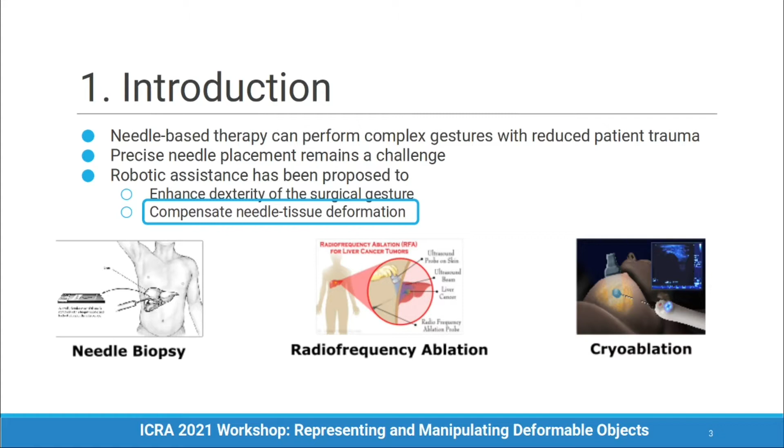In this work, we addressed needle-based therapies, in which precise needle placement remains a challenge. Robotic assistance has been proposed to both enhance the surgical gesture and to compensate the complex coupling between needle and tissue during the needle insertion. In this work, we'll target specifically how the robot can account for the motion of these deformable bodies.

The use of naive, rigid strategies for needle steering can lead to huge positioning errors. In green, we can see where the rigid strategies assume the needle tip to be and the result of a finite element simulation of the insertion.

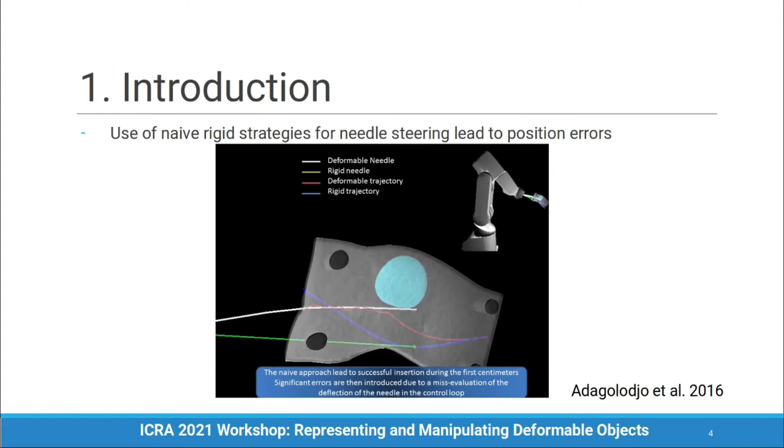The state-of-the-art discusses many approaches on how to model the needle steering and integrate it into robotic control. Both the kinematic models and mechanical energy models assume the needle insertion to happen into stationary tissues and only account for the needle deformation inside them. Finite element models, however, are able to simulate both of the deformable bodies and their interactions.

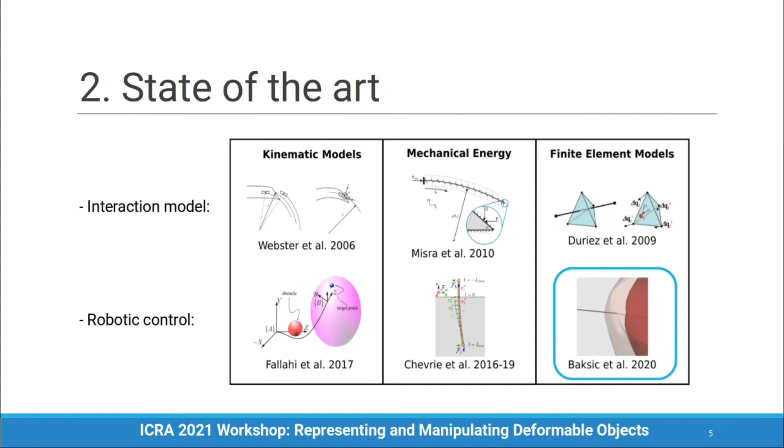We'll be taking a closer look at the Baksic et al. approach. The so-called inverse finite element simulations, or IFEM, are a promising solution. As you can see in the video, it is able to perform the needle steering in a complex trajectory while accounting for the soft tissue's deformations.

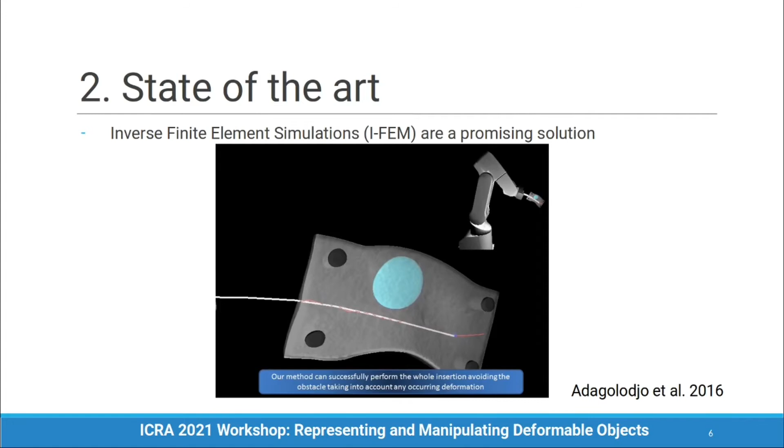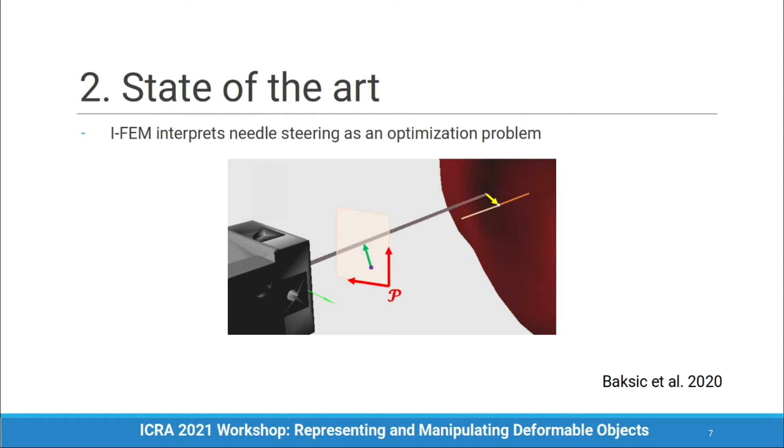IFEM interprets the needle steering as an optimization problem. It computes an end effector position which minimizes three objectives in the simulation: the tip-to-target error along the trajectory, the entry point motion, and the tangential efforts felt at the entry point. This solution is currently limited by the simulation complexity and can run at 20 Hz to perform robotic control.

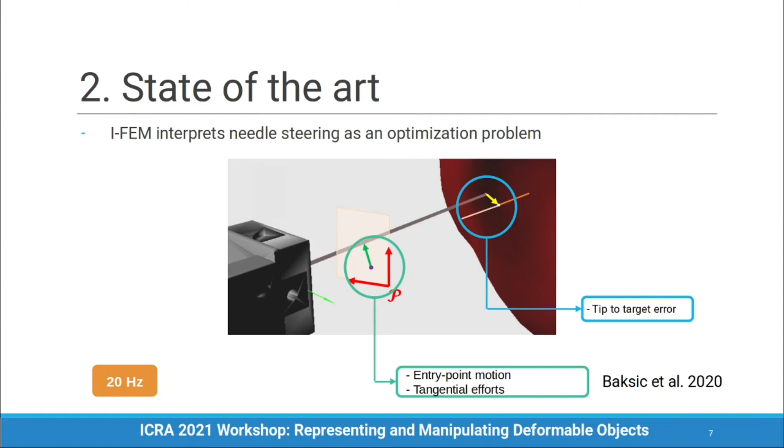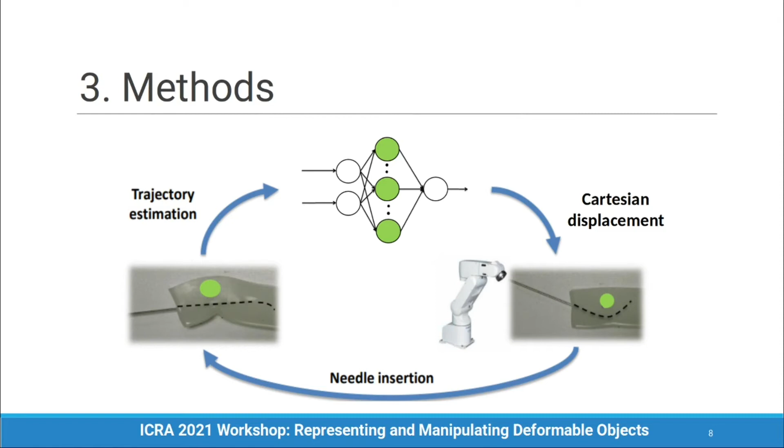In this work, we propose to use a machine learning model to solve the inverse problem and command the robotic end effector at a higher rate. The method will learn from IFEM demonstrations along 105 straight trajectories. Here are the main variables involved in the training process. We also chose to add uniform noise to the needle target position so it can better generalize to non-straight trajectories. We also compute the tip-to-target error for each time step and the displacement command produced by IFEM.

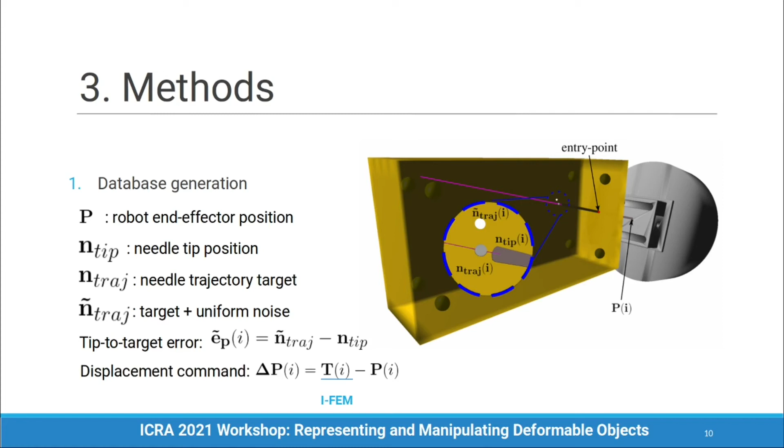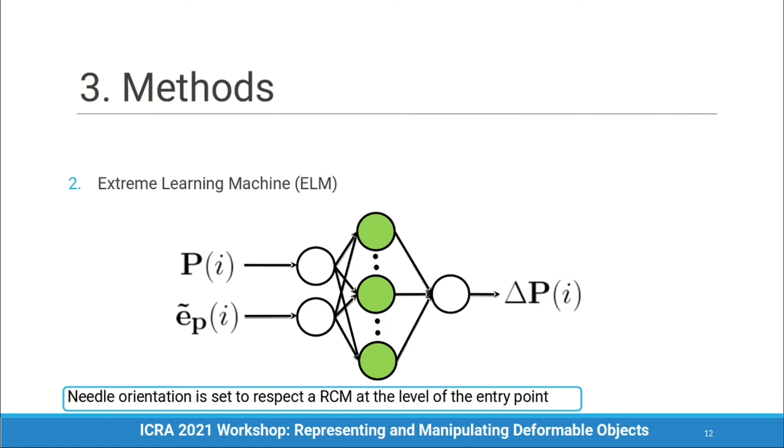The chosen neural network is called an extreme learning machine, or ELM, with a single hidden layer which presents fast learning speed and low inference time. As inputs, it takes the robotic position and the tip-to-target error and outputs a displacement for the robot to steer the needle along the trajectory. The needle orientation is set to respect a remote center of motion at the level of the entry point.

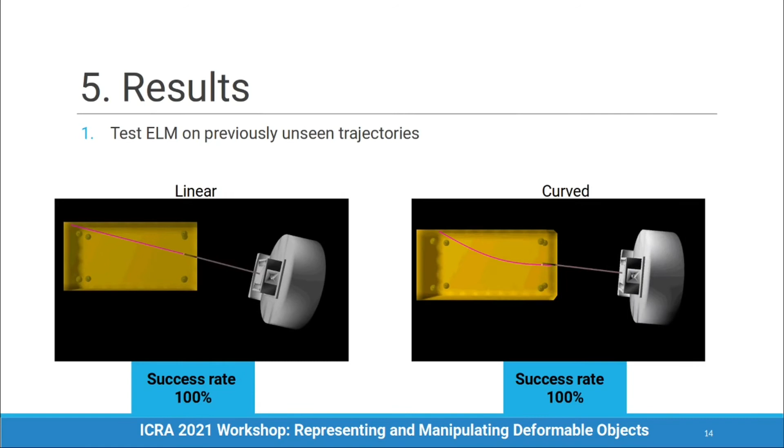In order to validate our method, we'll test ELM on previously unseen trajectories of both straight geometry and curved geometry. We will also test ELM on tissues with different elasticity parameters than the ones used for the training phase. Results showed the ELM was able to successfully perform needle insertion in all the previously unseen trajectories.

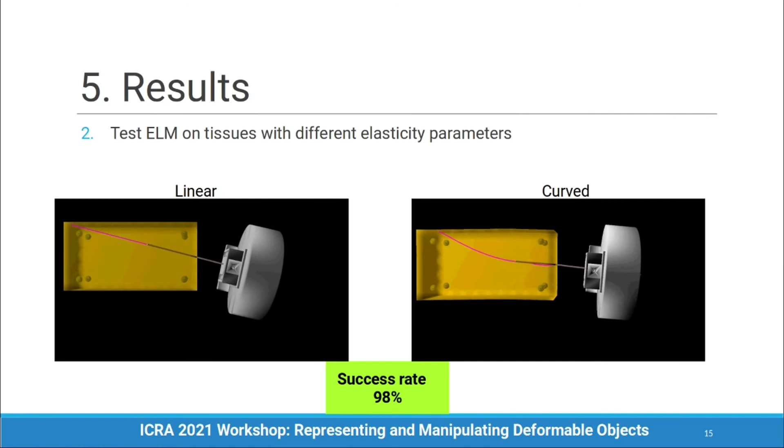When varying tissue elasticity parameters, a small subset of the insertions resulted in unstable insertions and the robotic command drifts away from the target. This occurred for trajectories in the border of the phantom, where the training data is more scarce. A precision analysis shows the ELM was able to provide clinically acceptable precision along the successful trajectories.

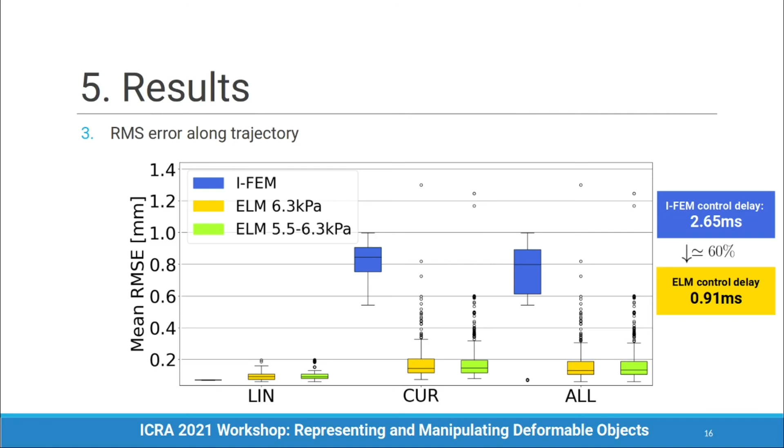As a conclusion, the ELM shows a promising ability to learn from IFEM demonstrations and shows relative robustness to trajectory geometry and elasticity parameters variability. Further tests are needed to compare it to IFEM, as mentioned before, and future works will address the entry point variability and more complex simulation scenarios where the computational time advantage might really excel. Here are the references, and thank you very much for your attention.